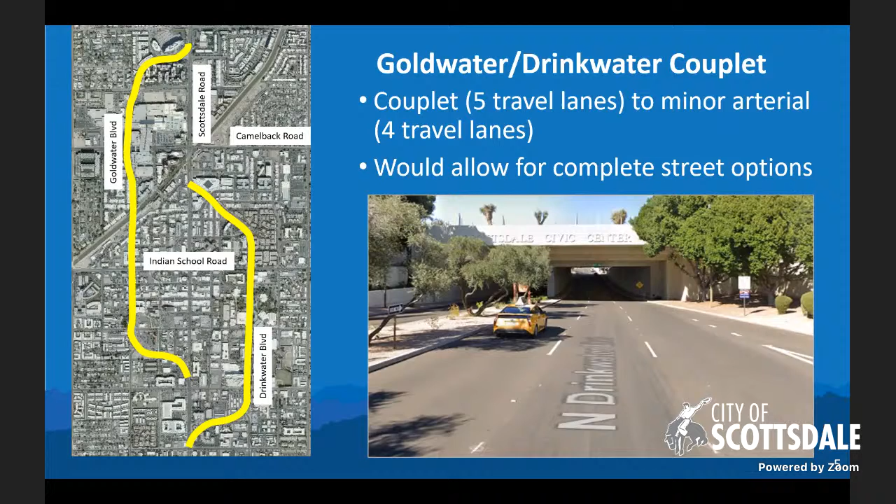Potential changes to street classification from the major collector with 4 travel lanes to minor collector with 2 travel lanes. There's a list here. We won't look at all of these on the map, but it's important to look at how these would improve cycling and pedestrian comfort.

So if we have a street that doesn't have bike lanes, this gives us the opportunity to add them. If it's a street that already has bike lanes, we could add a painted buffer. And then either of those options add a lot of distance between pedestrians and the vehicles in the travel lane, so it does make it better for people walking and biking.

So we are really looking at the long-term traffic volumes on these, and that's our methodology for these proposed changes.

And some visual examples that are pretty recent. There's a couple ways that we're focusing on these. The first would be the paint diet, which would be coordinated with pavement treatment during maintenance. That's where we can really add the buffered bike lanes.

On the left, you can see what 124th Street looked like before the paving treatment, and on the right, you can see how that looked. In this image, we had enough space to make a very wide painted buffer between the bike lane and the travel lane.

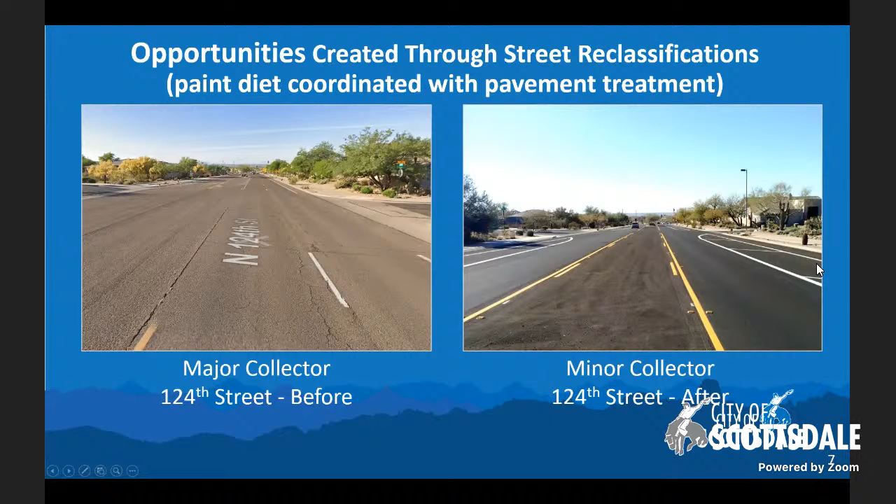And then the other option is, with a road diet, that's moving the curbs inward and narrowing that space of pavement. A great example for this is 96th Street, what it used to look like on the left several years ago, and what it looks like now as a minor collector. That space works very well for that neighborhood, and it's a good route with bike lanes and separated sidewalks and landscaped medians.

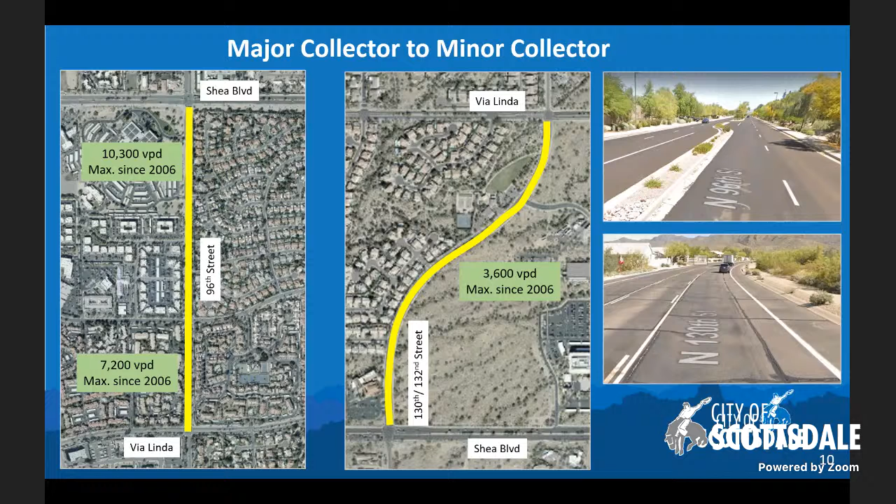These examples of major collector to minor collector changes also show up in that north central area of Scottsdale. So 96th Street from Shea to Via Linda wouldn't need the lanes we've got now—you can see what's there in that top photo, it wouldn't need those 4 lanes. And 130th and 132nd Street, near Mayo I believe, already has bike lanes but could benefit from the proposed changes as well.

Legend Trail Parkway, way north Scottsdale off Pima—this is an area that does have bike lanes, but it's got limited sidewalk. So if we can improve things here to not need those 4 lanes for traffic, we can repurpose that space for better biking and walking conditions relative to the amount of traffic it carries.

McCormick Parkway is one where Dave would probably add to the conditions right now on the traffic. He's out in that area quite a bit, and with the 4 lanes on this street, he can sometimes ride through and not see any traffic. So it's not needed to have those 4 lanes for the way that neighborhood functions from Scottsdale to Hayden.

Another proposed change is to have minor collectors remain as minor collectors, but remove the center turn lane. We've done this in a few locations already with our pavement maintenance schedule and had great feedback. This gives us the chance to either add a new bike lane or add buffered space to existing bike lanes—adding about 50 miles of bike lanes on this network. This is a great way to create the neighborhood bikeways we're proposing as our newer classification for our bikeway network.

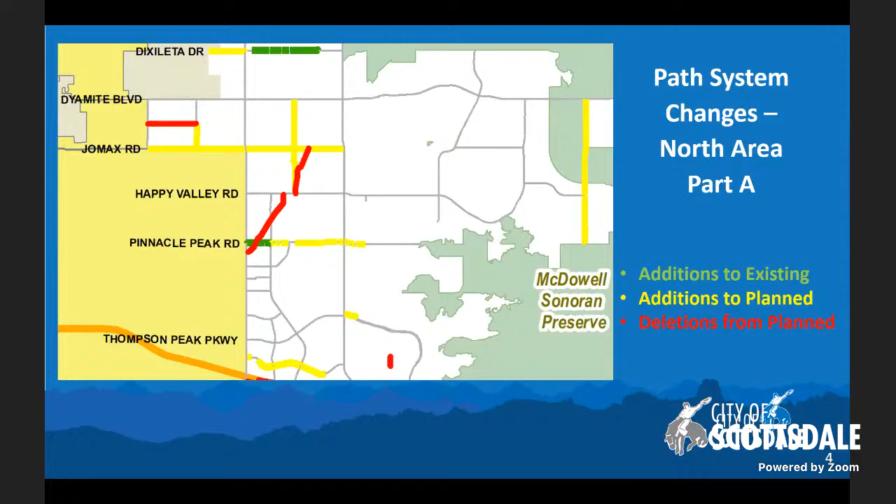This farthest north line, the reason we've removed this one, is that it's private up in Desert Mountain. It does exist, but that's private for that community, and we don't display those on our public network map. We still track what we know exists in some of the other neighborhoods like that. I know DC Ranch has private and public paths, and that's why you'd see that removed off of there.

For some reason I thought, maybe I skipped over it earlier, but we do have in our neighborhood bikeways planned network that includes... that's not on your slides, I don't remember, but I apologize if I missed it earlier or just didn't include it.

Susan, this is Dave. You've got it broken into two pieces, and the intention was to see if the committee had any concerns or comments on the path before we moved on. So we'll just have discussion now on the planned changes to the path network.

This is Subcommittee Member Davis. I have a few questions, Susan, so I'll just rattle through them. The first question: in the previous version of the current transportation master plan, these kind of side paths had a priority ranking assigned to them.

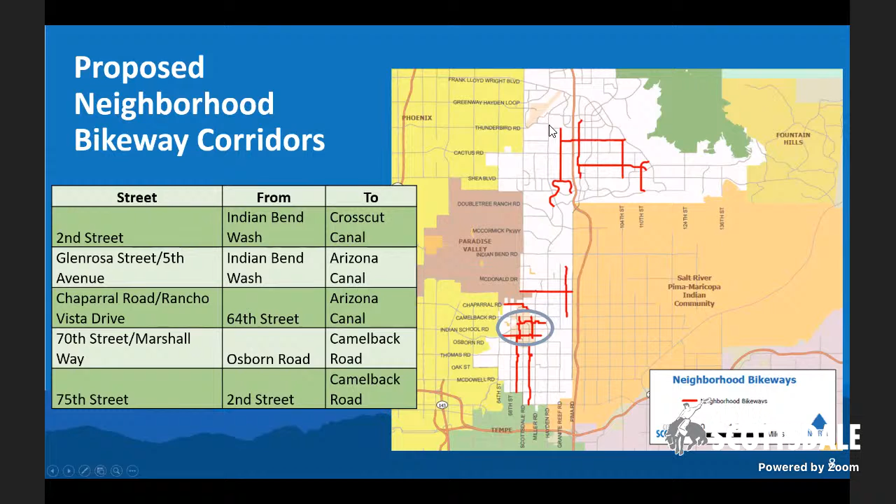Now this is Greg's section. Thank you, Chair Anderson and members of the Paths and Trails Subcommittee. This is an important meeting since we're talking about the Transportation Action Plan, and Susan has gone over the streets and paths elements. This is the trails element we can talk about now.

We have a pretty robust system in the city of Scottsdale, with 150 existing miles of trails. Through this process of refining our system and updating the Transportation Master Plan, we're looking at areas where we can refine it further. We went through the existing plan network, which was about 188 miles, compared to our existing 150 miles.

It's a significantly robust, citywide system. This doesn't include any trails within the McDowell Sonoran Preserve, which has 220 miles of trails—the preserve is essentially its own entity. There are two main objectives with the trail element in our Transportation Action Plan: to enhance the neighborhood trail network and to have connections that link to the preserve. That's the intent of our trails element.

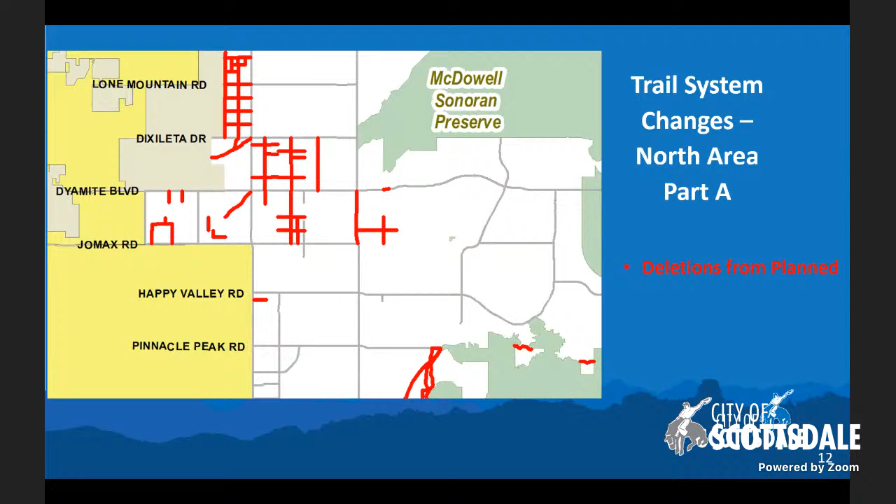Thank you, Susan. Thank you. I think we're good, move on.

And we're moving on to item number 4, guidelines to identify pedestrian crossing treatments. Kiran?

Good morning. Good morning, members of the committee. Again, I'm trying to share my screen, give me one second.

Can everyone see my screen? Yes, we can see it now. Thank you, again good morning. This is Kiran Guntupalli, Principal Traffic Engineer with the City of Scottsdale.

Today I'll be presenting on the city's guidelines to identify pedestrian crossing treatments. This document helps us in uniform analysis and recommending countermeasures at pedestrian crossings.

The background on why this document was developed is because we receive a number of requests from our citizens requesting pedestrian crossings be installed at various locations. As part of our job, we want to make sure our facilities are safe for pedestrians, and this document gives us a platform for analyzing these locations and providing uniformity.

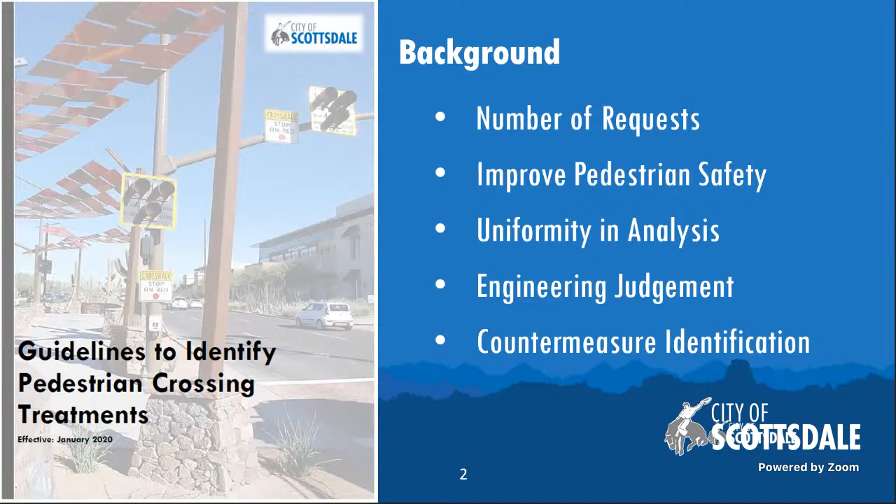And this comes with engineering judgment. Not all countermeasures are uniformly applied at all locations, so the countermeasures come with engineering judgment and also countermeasure identification.

These guidelines were developed taking into account our past experience in developing these countermeasures, and we also referenced other documents and studies, including the Federal Highway Administration's Safe Transportation for Every Pedestrian as a resource.

We also looked at the Arizona Department of Transportation's Pedestrian Hybrid Beacon evaluation sheet in developing these procedures, and also an important document considered as the Bible for all traffic engineers, the Manual on Uniform Traffic Control Devices, was used in developing these guidelines.

We also identified about 20 study locations and used these guidelines to refine how this document would work in our system. So we used these guidelines in analyzing a set of locations to make sure the countermeasures identified meet our city's expectations.

The evaluation procedure starts with identifying the location. This is the first step, where we collect all the information relevant to the location. The second step is collecting data - we look at the pedestrian volumes, the vehicular volumes, and observe what's happening at this location, then perform an evaluation to recommend an appropriate countermeasure.

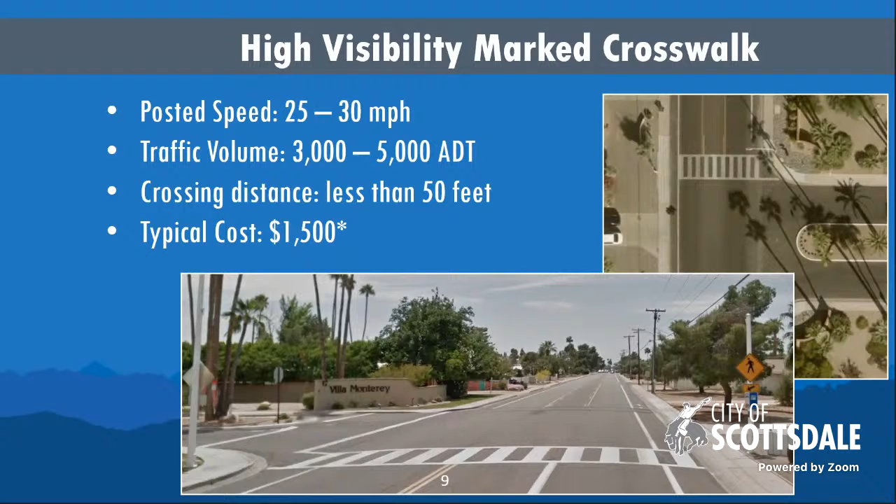The other type of countermeasure that's been used is in-pavement signage. This is applied where there's typically a higher traffic volume than where a high visibility crosswalk is applied. Something to note with this in-pavement signage is that they get hit pretty frequently, and there's a lot of ongoing maintenance cost involved with this type of treatment.

The other type of countermeasure observed in Scottsdale is a raised crosswalk. These are typically installed on low speed facilities, and they also act as a neighborhood traffic mitigation measure where traffic typically slows down approaching these raised crosswalks. The typical cost of this is about $8,000.

To make it more obvious, sometimes we also include high visibility crosswalks and in-pavement signage to go along with these raised crosswalks.

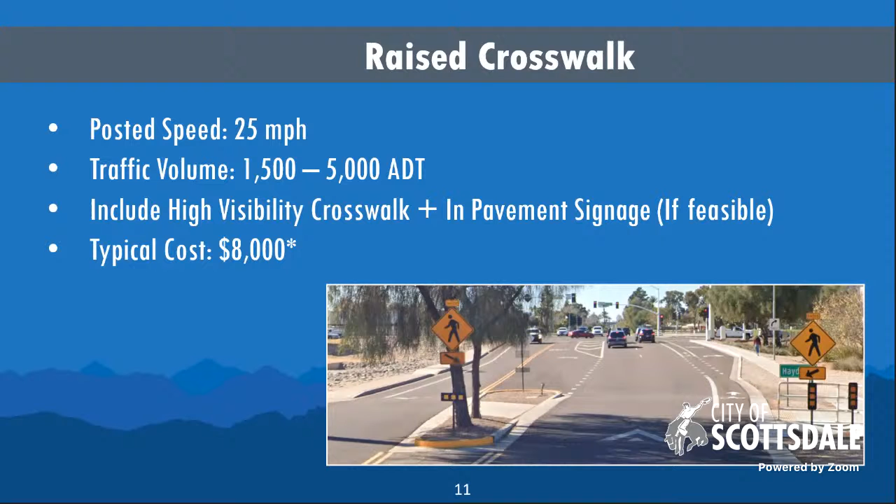The next type of countermeasure is a bulb out or curb extension. This is again applied at low speed facilities as well. This reduces the crossing distance for pedestrians and is typically used where there is heavy pedestrian activity, more in an urban environment. The typical cost of installation of such a countermeasure is around $15,000 per extension.

Unmarked pedestrian refuge is typically applied on facilities with 30 to 45 mile per hour speeds, with medium to high traffic volumes and not as much pedestrian volume. This helps reduce the pedestrian crossing distance and provides a refuge for pedestrians to stop and observe traffic before crossing. The typical cost of installation is about $30,000, mostly because of the cost of providing ADA ramps at either end along with the medians.

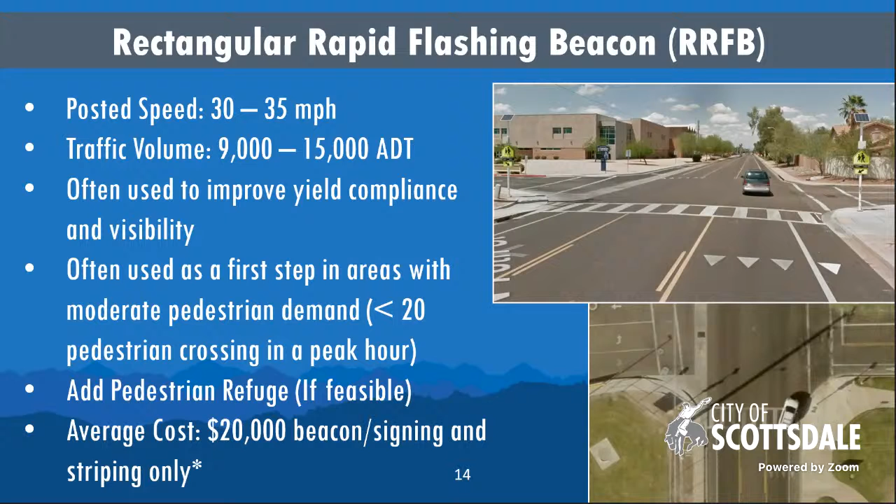If the crosswalk or crossing distance is huge, we typically add a pedestrian refuge. The typical cost of this installation is around $20,000 to $25,000.

A pedestrian hybrid beacon is a more controlled crossing. These are used where there are heavy pedestrian volumes, where the posted speed limit is between 30 to 50 miles per hour, and traffic volumes are more than 12,000 ADT. It's typically applied mostly on major collectors or arterial type facilities.

There is MUTCD guidance on where these need to be applied. This is a traffic device that assigns right of way, so vehicles are typically required to stop when this type of traffic control device is installed. The average cost of this installation comes up to around $250,000. Again, this is the typical cost, and depending on where it's installed and other facilities around the installation, the cost may be higher.

The next type of traffic control device typically used for pedestrian crossings is a traffic signal. MUTCD, the Manual on Uniform Traffic Control Devices, provides a typical warrant analysis for deploying a pedestrian traffic signal. Again, the cost of a traffic signal is anywhere between $275,000 to the recent cost I've seen, which is about $500,000.

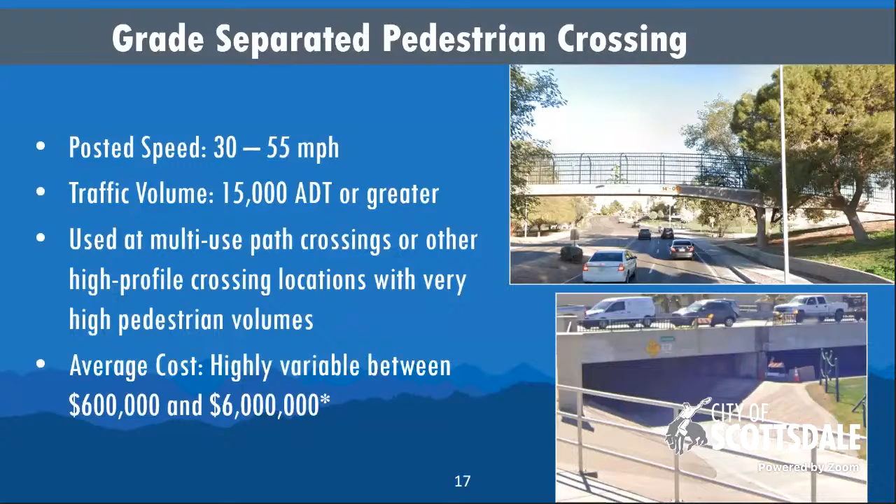With that, I'm happy to answer questions. Thank you, very informative. Let's see, does anybody have questions for the subcommittee? I don't see any hands.

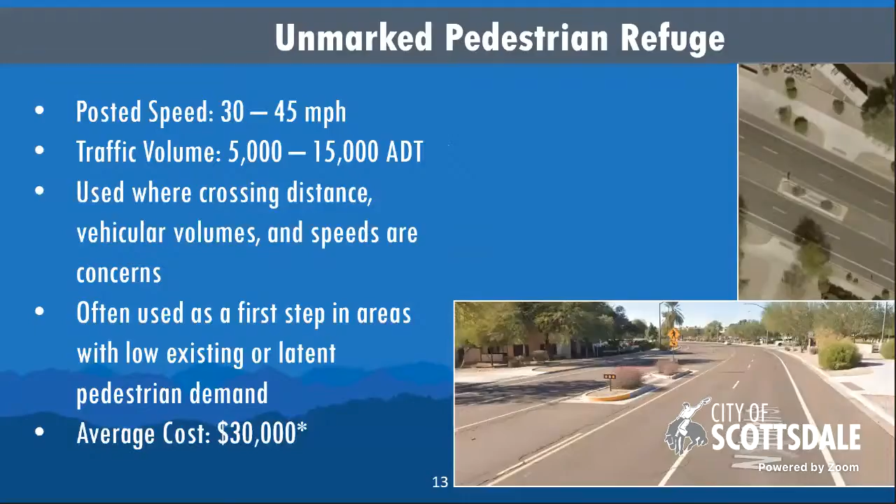I have one, yes sir. When you go back to your pedestrian crossing evaluation, I think you said that typically 30 points must be achieved. That indicates to me that you need to have at least 2, 3, or 4 of the items met before you'll consider changing the crossing.

Is that true? Commissioner Anderson and members of the committee, we look for 30 points to identify a higher level of crossing treatment, that is a rectangular rapid flashing beacon or a pedestrian hybrid beacon. For a local street with fewer crossings, we typically use what's called an unmarked crossing, which doesn't require as much. If we see a level of pedestrian activity that doesn't rise to a significant number of crossings, we still treat it with some kind of treatment, either an unmarked or marked crossing, depending on the type of facility. But the higher 30 points are typically required for a higher level of treatment.

So what you're saying, and I agree, is that for some of these lesser treatments, you don't need 30 points to warrant it. Exactly. Thank you, that's what I wanted to hear. Okay.

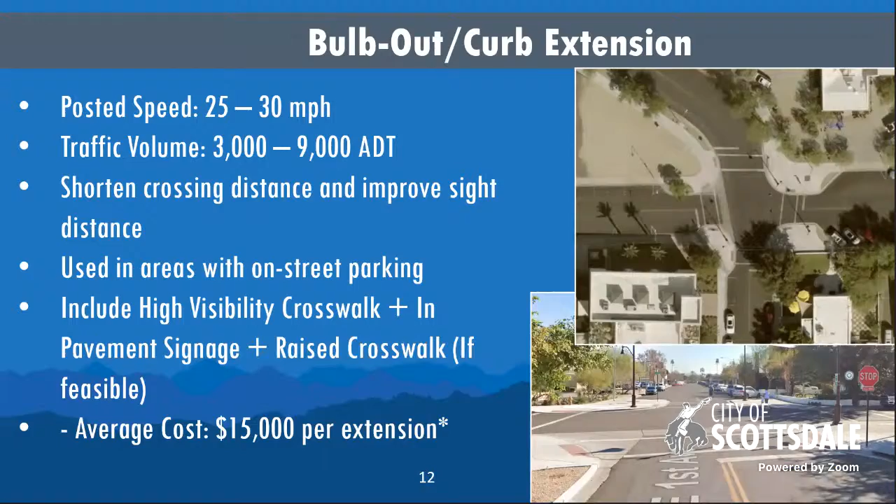Yes, this is Ted Levy. Just a quick question, more to understand the terminology. Going back to the example of the pedestrian hybrid beacon, is that what I've also heard referred to as a HAWK light or HAWK lighting? Exactly. Pedestrian hybrid beacon is more the MUTCD terminology, and HAWK is a commonly used term. It's called HAWK because it's a traffic control device developed in Tucson by a well-known researcher named Richard Nassi, who named it HAWK. But when it got moved into the MUTCD, it became officially called a pedestrian hybrid beacon. Okay, got it, thank you.

Thank you. Any other questions? I don't see any more. Well, thank you, Kiran, for the presentation. Let's move on to the next item on the list.

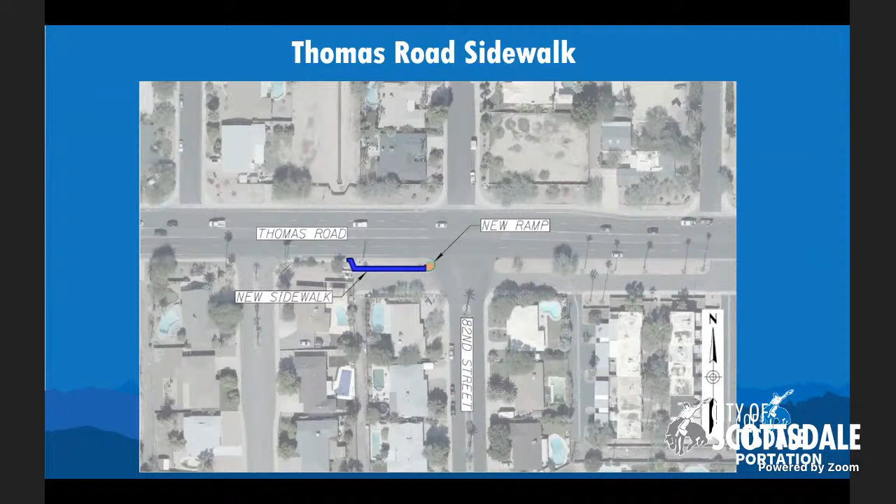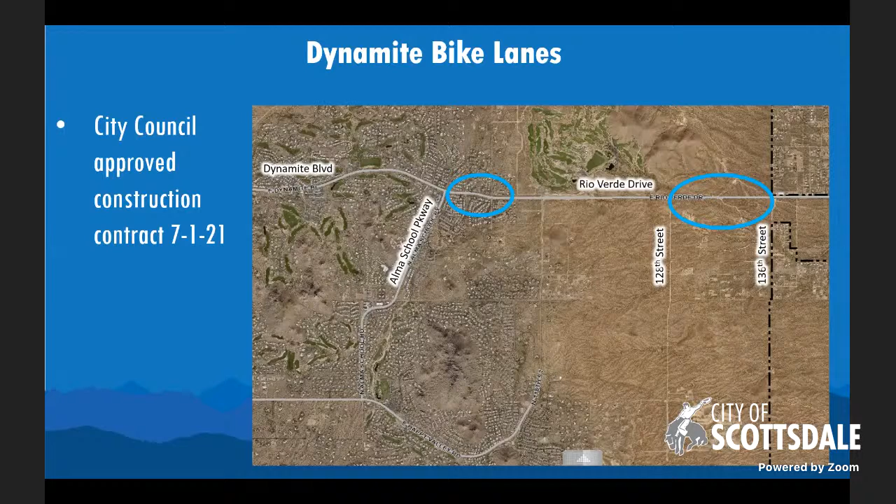And I think that's it. Does anybody have questions? I don't see any hands. Thank you, Susan. Great, thank you.